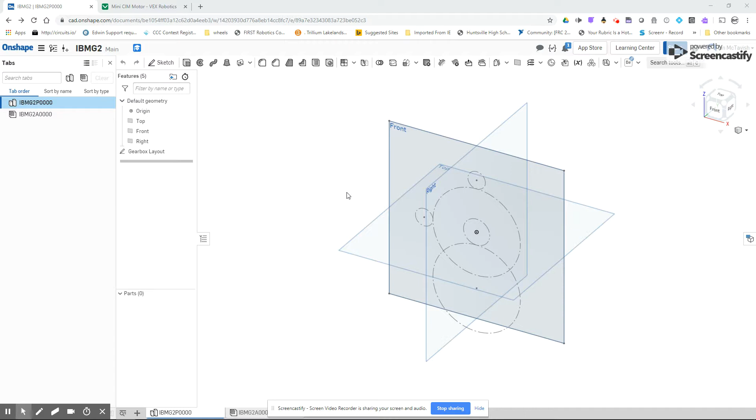This is the third in our video series, and this video is taking the sketch that we created, the two-dimensional sketch, and we're going to transform that into a part and start assembling our gearbox. So we're in the part studio, and here's the sketch.

The first thing is that we need to find our motor. So we're using the mini CIM motor, and Vex Robotics has lots of details. AndyMark is another supplier where you can get these things. In the Vex Robotics website, I really like their drawings. It's easy to find the information I need. So with this motor, we're going to need to mount it.

So here we can see there's a 2-inch circle, and on both sides of that 2-inch circle there are 2 holes, and those holes are 0.159 inches in diameter. The pinion as well, it's going to need to fit. This is the shaft part, and you can see that that's 0.75 inches. So those are the critical dimensions that we need to be able to access.

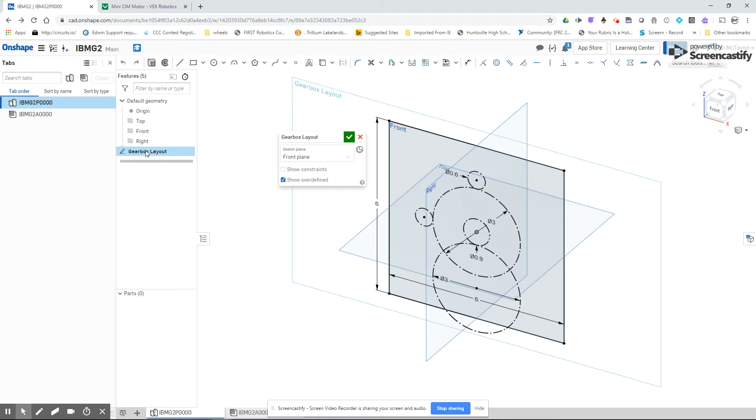So in the part studio, we need to double click that sketch, and we're going to use that. The key thing is we're reusing the sketch because we want to be able to use these construction circles to set everything up. First thing that we're going to do is we're going to create a vertical line. So there's my line tool.

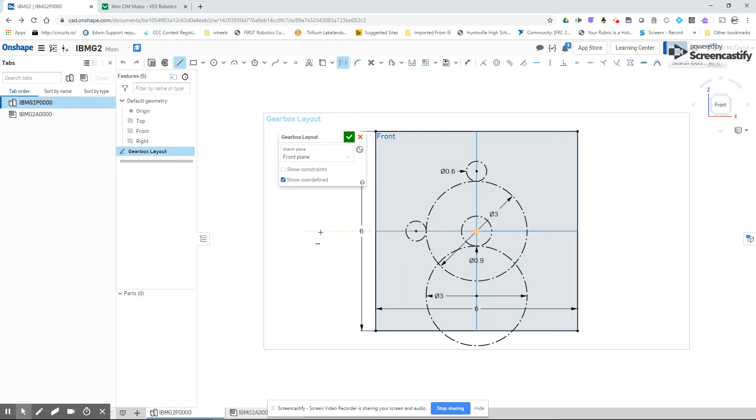It's going to be a construction line, and I'm just holding it over, and I want to make sure that nothing is going orange, because that indicates that it's constrained in some way. So I'm just going to do it here, and I've got a nice vertical line, and that line I'm going to set to 2 inches.

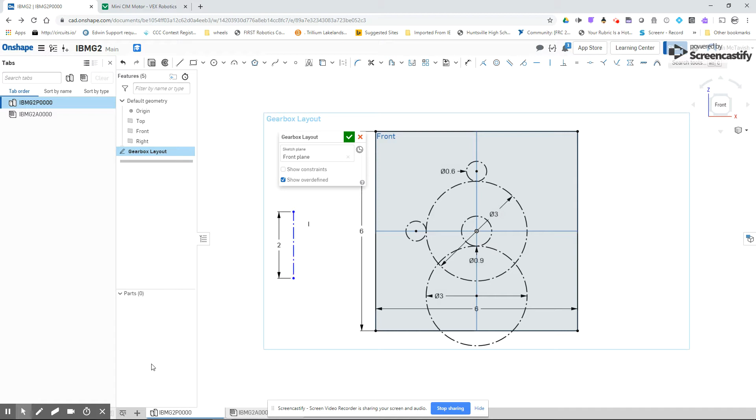So with creating lines, you click the first point, you move the mouse, click a second point, and I made sure to hold my mouse so that this little vertical constraint icon showed up. Once you've clicked twice, then you just type the dimensions that you're dealing with, and you're good to go. And all my dimensions are in inches. That was set in the first video.

Now, I'm going to add a constraint to this. I'm going to select my midpoint, and I'm going to select the line, and I'm going to select this point right there. Because my mini CIM is going to go in this location, I'm going to have another thing there. So here's my second line. So this is the same idea, but this one is going to be horizontal.

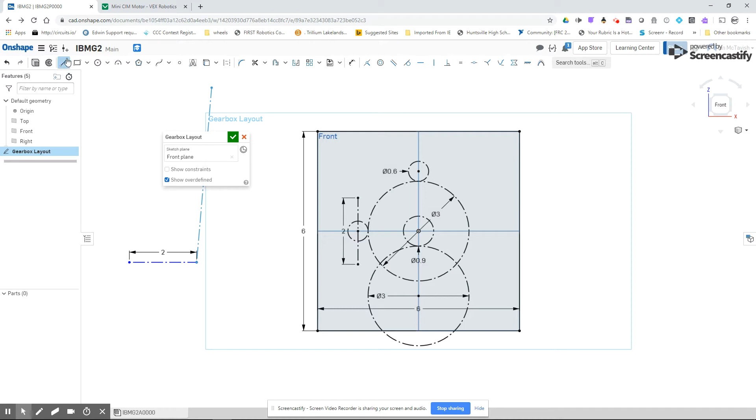Again, it's 2 inches. And if you notice, when you hold your mouse over things, you can see shortcuts that will help you out. So there's my midpoint, and that's going to be here. So now that I've got those in position, I'm going to be adding these circles.

So basically, 0.159, if I do 13/64, then we can use a 13/64 drill bit to drill through those, and that should be more than enough space for a 10-32. And you can see that it's a 10-32 machine screw that they use for this.

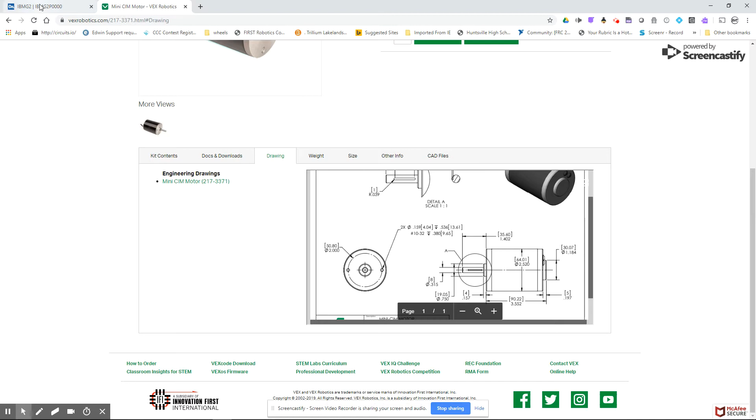So center point circle, and I just make sure I'm on the point, and because I'm doing a 13/64, I can actually just type 13/64 and enter, and that's 0.203 inches, but it does the math for me. I don't need to worry about it.

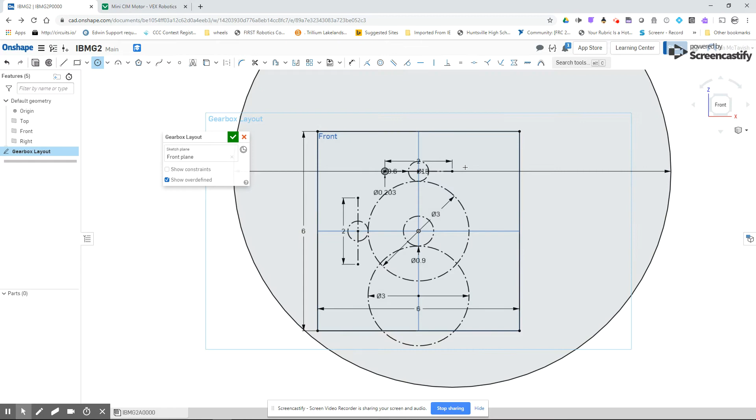So I just made a bit of a mistake there, and that's okay. When you make a mistake, you just fix it. So I just need to see where my measurement went. So yeah, I don't need 13 inches. I'm just going to copy that measurement so I can quickly do this. I could also use the equals constraint. So I'm just going to escape, and I'll show you what I mean.

There's the equals constraint, and that way I can constrain these circles to be exactly the same diameter. When you have multiple circles the same diameter, that's a great strategy, because you make one change and everything will change.

So I've got those all set up. Now I need a circle that's going to go right there, and this circle is going to be 0.75 inches, so that the gear and the pinion will fit right through. The gear and the shaft of the motor will fit right through there. So 2 of these. You'll notice these are solid black, so that means they will become holes when I move on,

which is great. Now, right here, these are where my gears are, so I'm going to have a shaft go through there, and basically I'm going to have a flanged bearing. So I can look through here, and there's hardware, there's bearings in Vex Robotics, and I'm looking for 0.5 inch diameter. So these are my flange bearings. So there we go. So that's the part number, and I can look in my drawing.

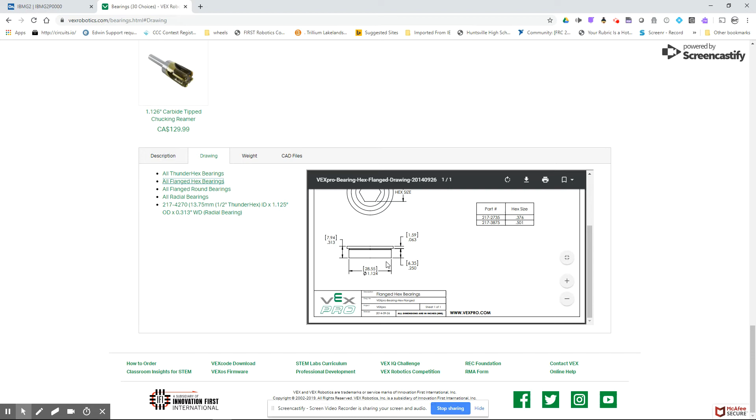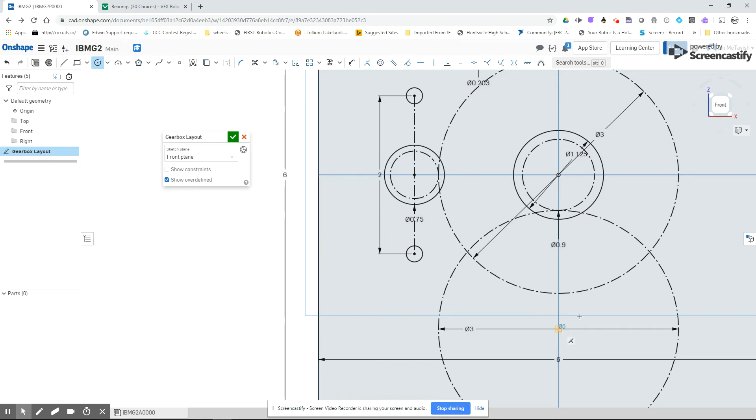And so the diameter of my hole needs to be 1.125. So I want it just a little bit bigger than what they've got so that I can put the bearing in, and it's not so big that the bearing's just going to move around, but it's nice and snug and it will fit. So I'm going to create a circle there, and it's 1.125. And I'm going to have a bearing where this gear is for the shaft there, 1.125.

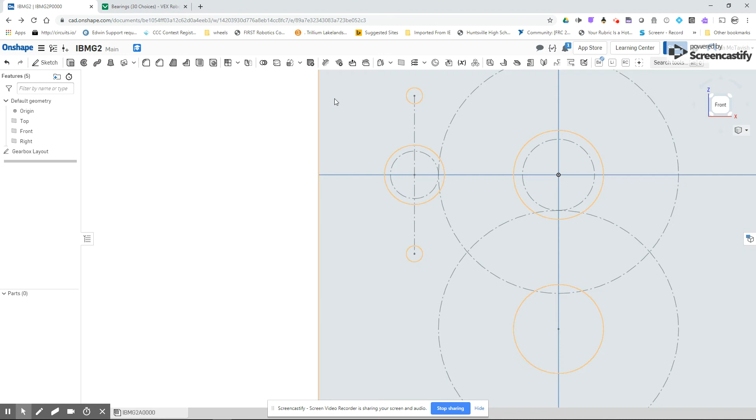Now, my sketch is complete. I can click my green check mark, and there's my sketch. Everything's in good shape. Now I'm going to extrude this. So I'm just going to click the extrude button and click the sketch. And the bonus is, because I clicked in the rectangle, it will make that solid, but it will leave holes wherever I have those circles. So I don't need to do much work to do that. And 0.125.

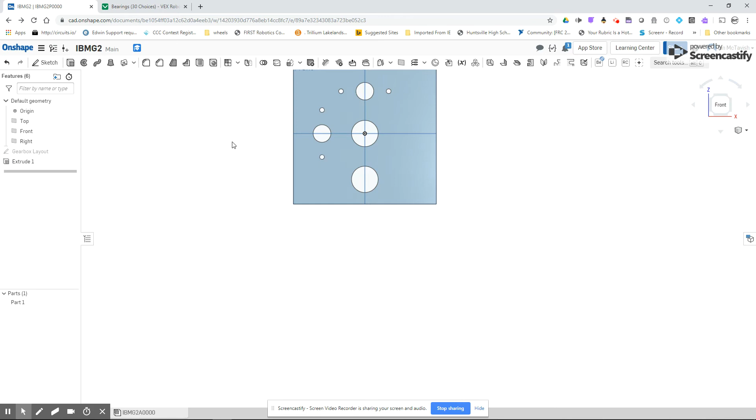Now, the one thing is, I'm going to go back into my sketch. You'll notice that this circle is going to extend, so I'm just going to change that to 9 inches. Now, the only problem is, because I've centered it on the origin, everything is going to stretch symmetrically, which for my tutorial, I don't really care. That's fine. Now, down here, I've got a part.

Really important that we name things as we go. And so I'm renaming my extrude, and I'm going to go into properties, and I'm going to name my part. So part 1 is useless. We can have hundreds of parts in a robot, and if they're all called part 1, it's very hard to figure out what's going on. So I'm going to call this gearbox plate, which is pretty descriptive.

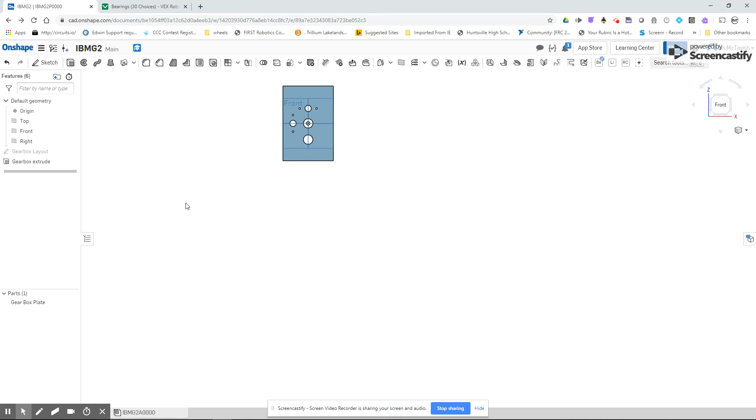And that concludes that step. We now have a 3-dimensional part, and that 3-dimensional part, in the next video, we're going to start assembling our gearbox using that.